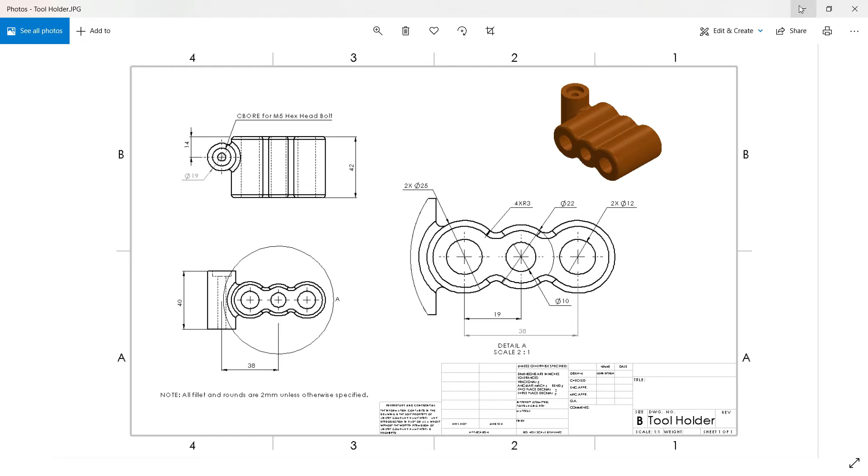Dimensions are provided. Have a detail view at A. You have the front view and the top view, also the isometric view. So I'll just minimize this one and start creating the part itself.

Let us create a new part file. Make sure that you double check your system units under document properties. I just change this to ANSI and units MMGS, and probably I just use no decimal places, then OK.

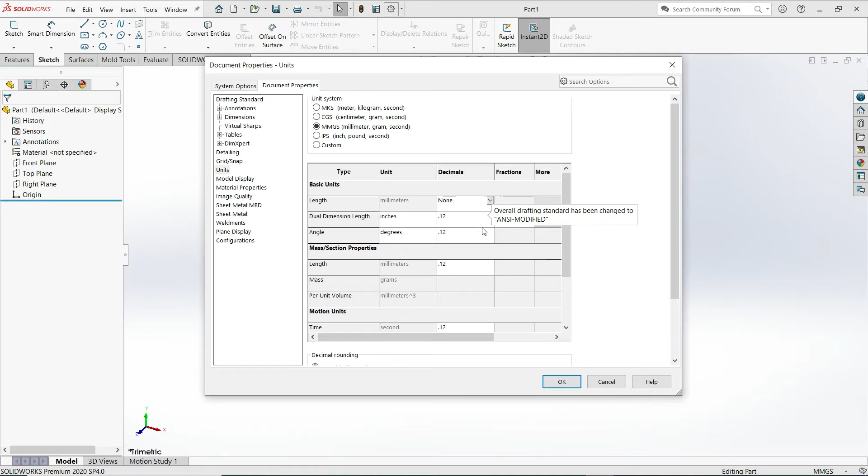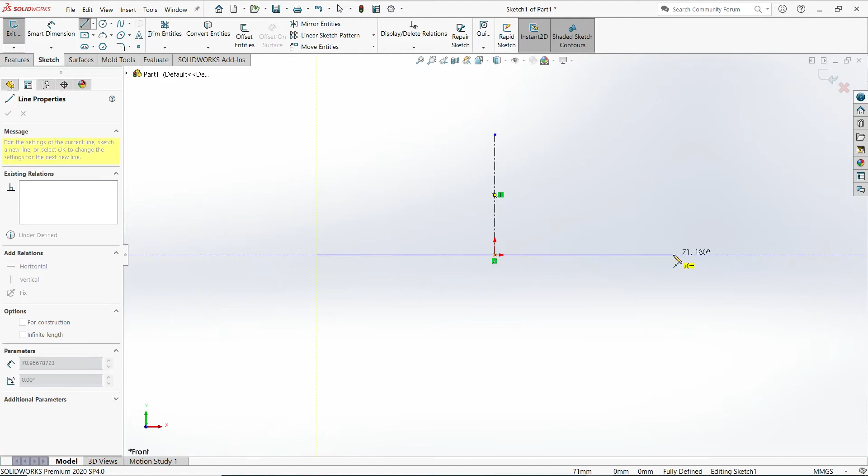I'll just sketch the profile using the front plane. I'll sketch a center line, and I'll sketch another line which is a midpoint line. I just draw a horizontal midpoint line here. Right click and select, I click this one and make that for construction. Then OK.

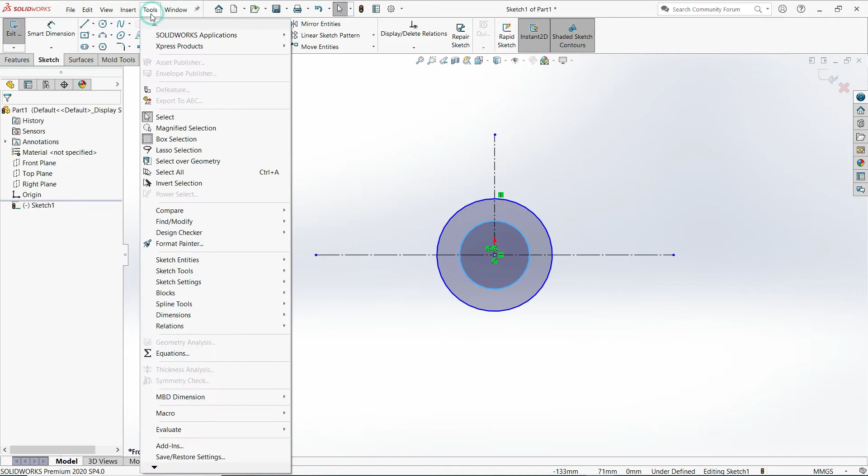So I'll just draw circles, and I'll use dynamic mirror. Select this vertical line, just draw circles here, also this one. Then I'll add the dimensions using smart dimensions.

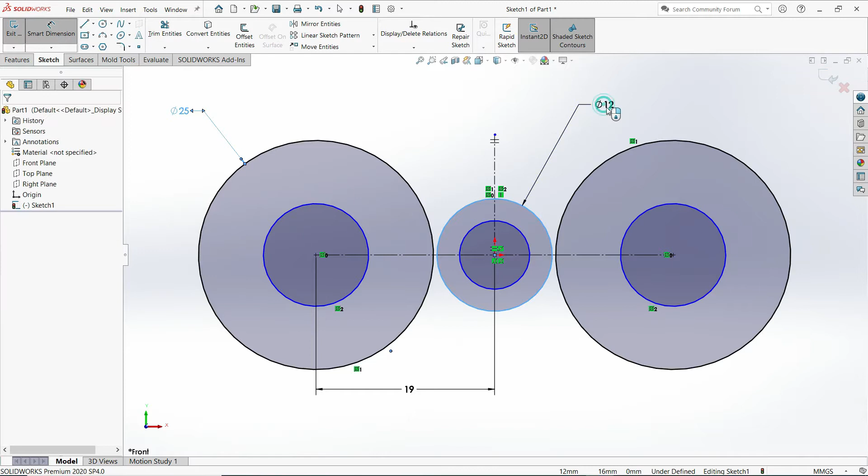I'll just measure this one, provide dimension here, let's say that is 19. This is probably diameter of 25. This one is 22, I think. Let's say this is 10. This one, let's say this is 12.

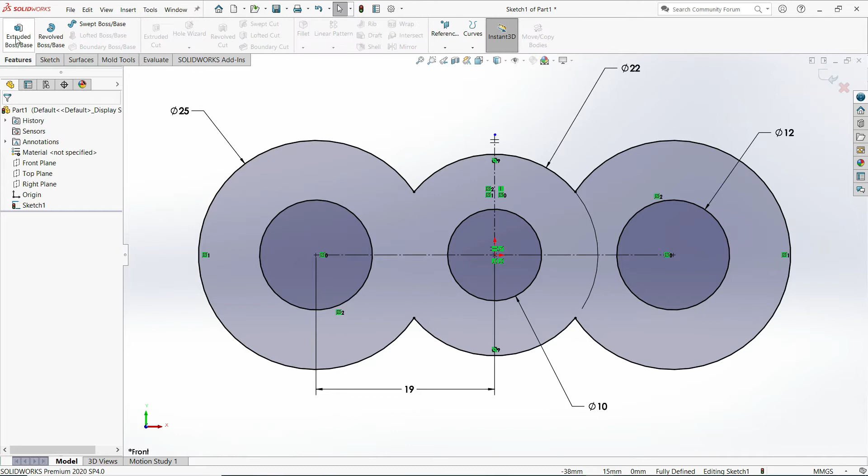I'll just use trim entities. Notice that the sketch is fully defined, so I'll close the dialog box and use the feature extruded boss base. Here I will select mid plane for the condition, and the thickness is given as 42 millimeters. OK.

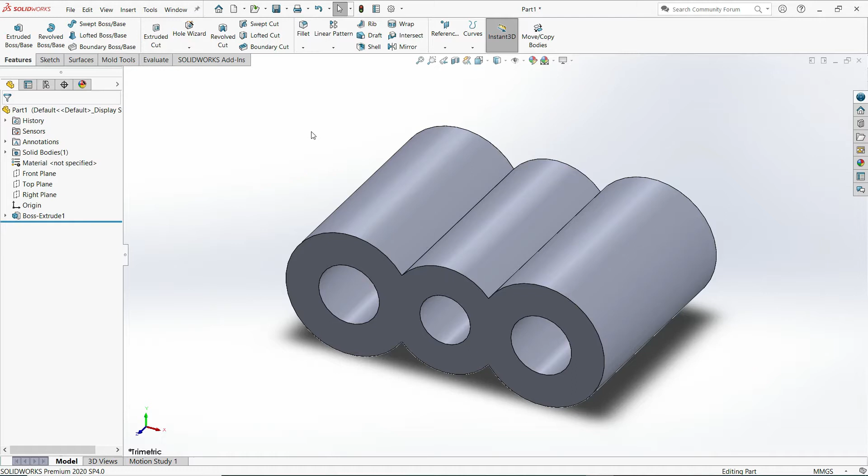So I'll just change my orientation view to top view. I select the top plane and sketch. I'll sketch a circle. Provide dimensions from the center up to this edge.

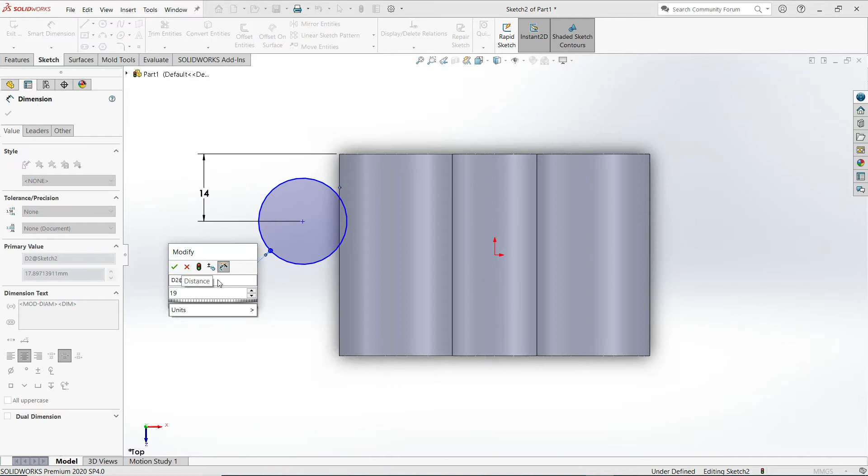So this is 14. The diameter of the circle is 19. The distance between the origin and the center is 38. Then I'll use extruded boss base again. I'll change my orientation to isometric view, use mid plane, and this one is 40. And OK.

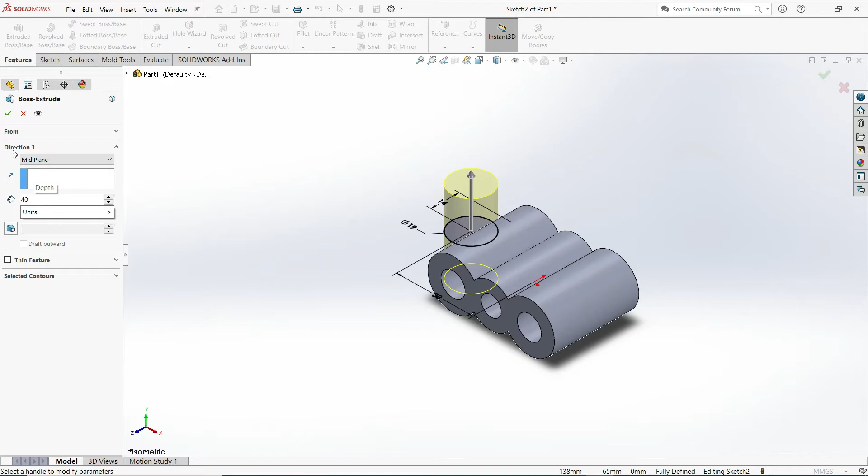Now I will be adding a special hole, so I'll use hole wizard. I'll select the counter bore under the hole type. Standard is ANSI Metric, and the bolt is M5, so it's good to go.

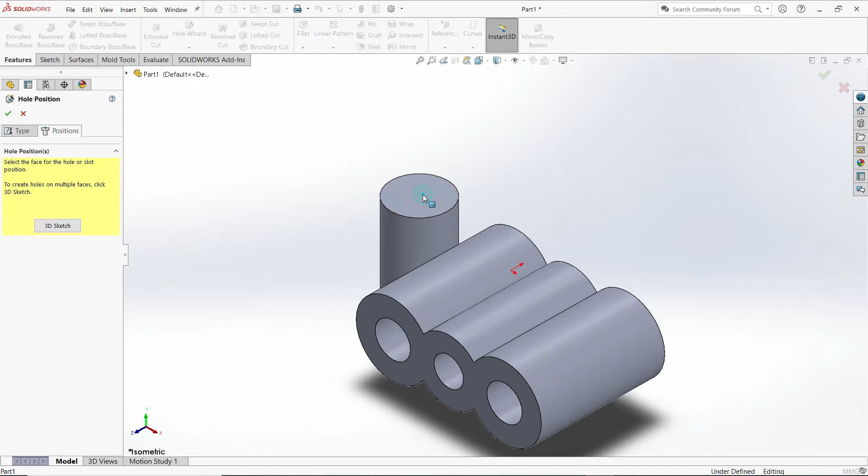Then I'll go to the positions tab, select the top face of this cylindrical boss base here. I'll invoke the center of that circle by hovering the cursor to the edge or circumference, click the center of that circular edge, then OK.

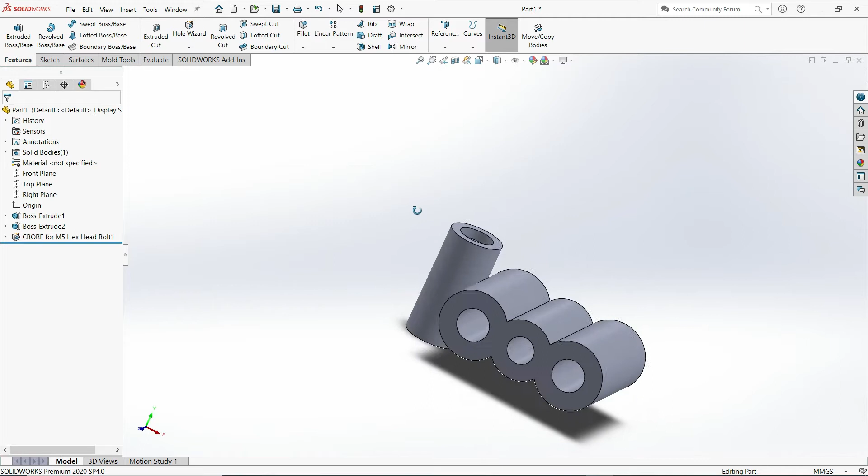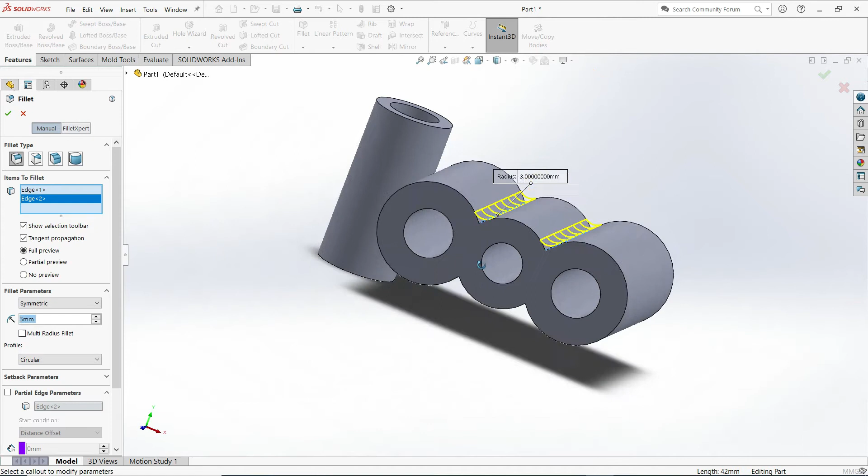So I have here the model, then I'll add some fillets. Radius is 3. I select these edges here, and also at the bottom. Then OK.

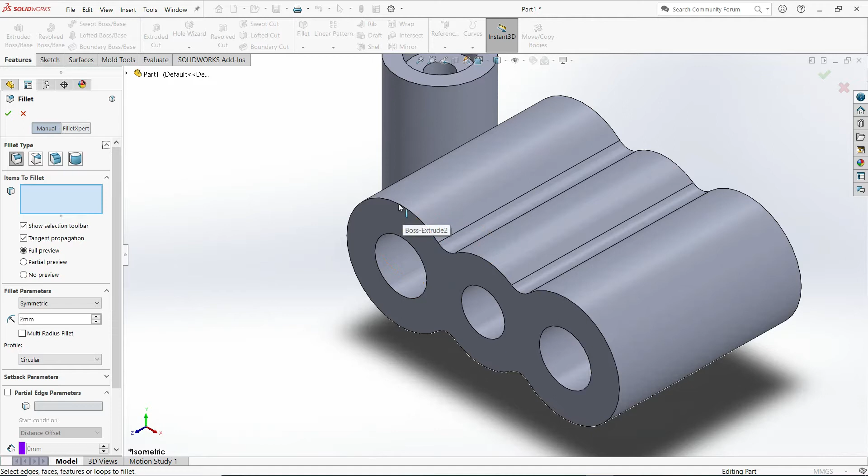Then I'll add some more fillets. Radius of 2. Select edge, this one, and also the edge on this portion here. Then I'll click OK.

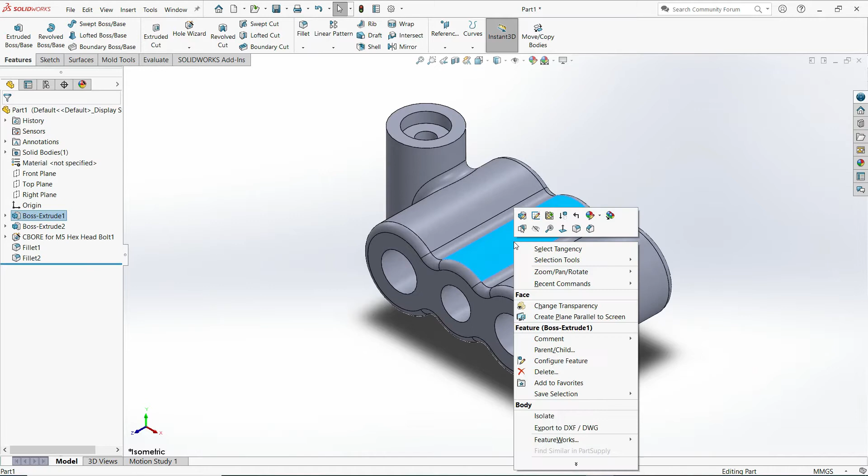Let me just change this appearance. Just right click under appearances, I'll select part. Probably change this color, so you would choose any color that you want here. Then I'll click OK to accept that color and change my display style to shaded only.

Then I'll just save this file as. I'll go to the tool folder. Then click the save button here.

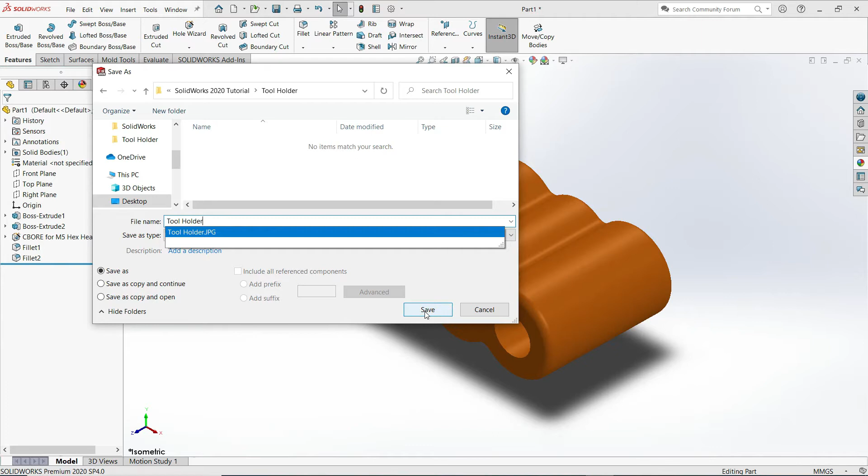Now I'll just create basic detailing of this part, which is a tool holder. So I'll select file, make drawing from part. Now the standard sheet size will be available for the sheet format size dialog box. So I'll select ANSI landscape, then OK.

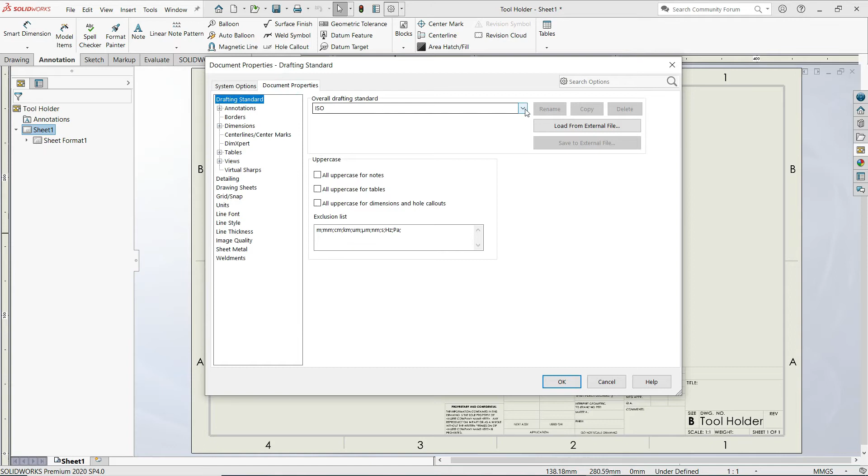Now the view palette is available under the task pane, so I'll later be selecting those views. Before that, I need to verify my settings, especially the units. So I'll click anywhere in the sheet area. Then system options, document properties, ANSI, then units MMGS, let's say no decimal places, then OK.

Notice here the file name of the part is provided under the drawing number. We could edit this one by simply right clicking sheet number 1 and then edit sheet format.

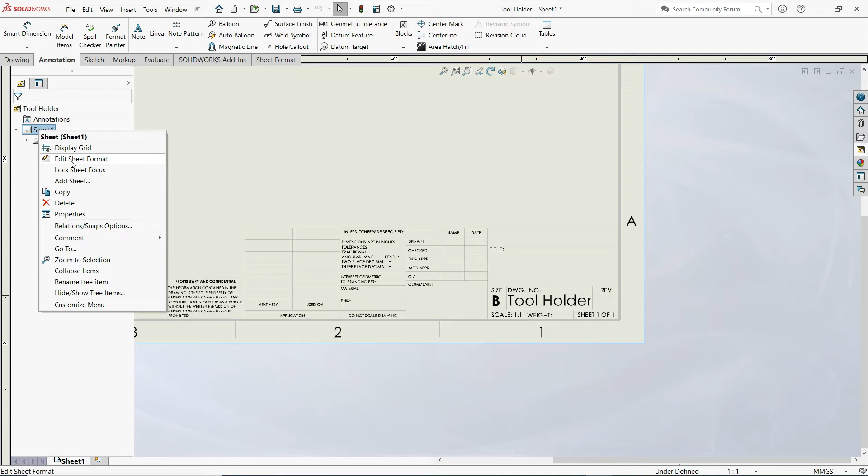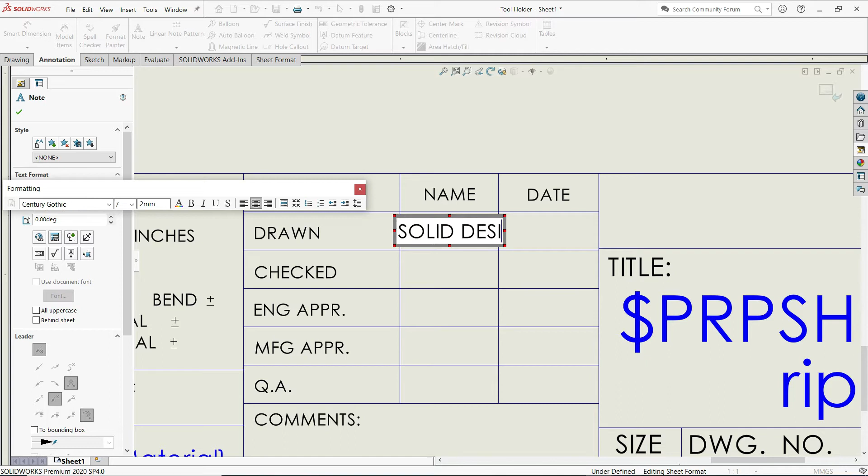So you could add a name here, probably with that note, text, then simply here I'll double click here, then provide a name. You have your formatting toolbar here, so I'll select everything, then I'll type a possible number here for the font size probably, and click outside.

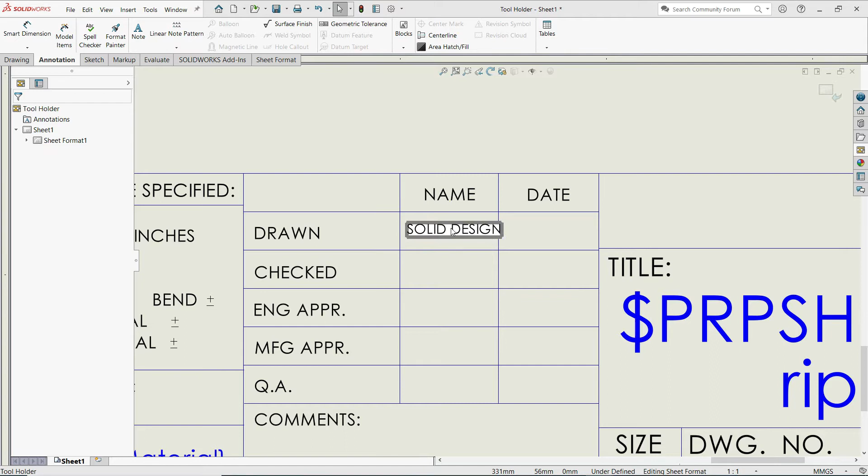Then I'll click, hold, and drag to place this location here. Similarly, you could double click anywhere here to change those names and so on. So I'll exit sheet format, since I have changed already. So you have here drawn by Solid Design.

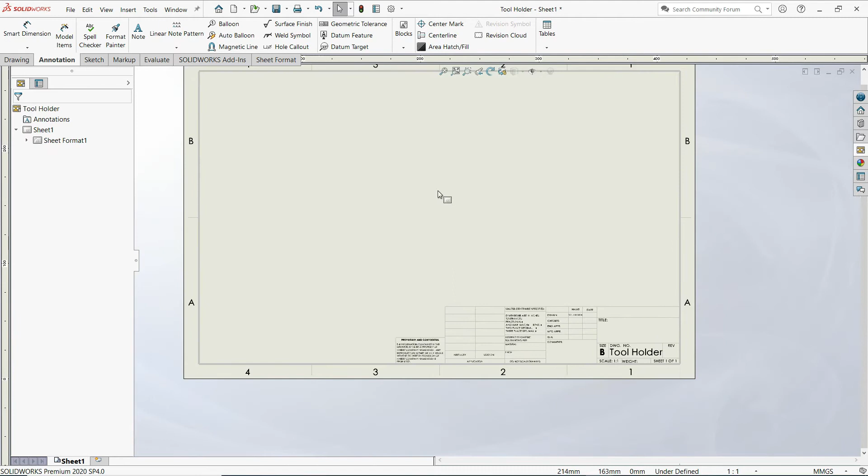I'll just press this F key so that it will fit in my graphics area. Now I will be selecting the views using the view palette. I have this toolbar here, then I'll select refresh. So among these views, these are the front, top, right, back, left, bottom, isometric, and so on, and even the current view from the open file.

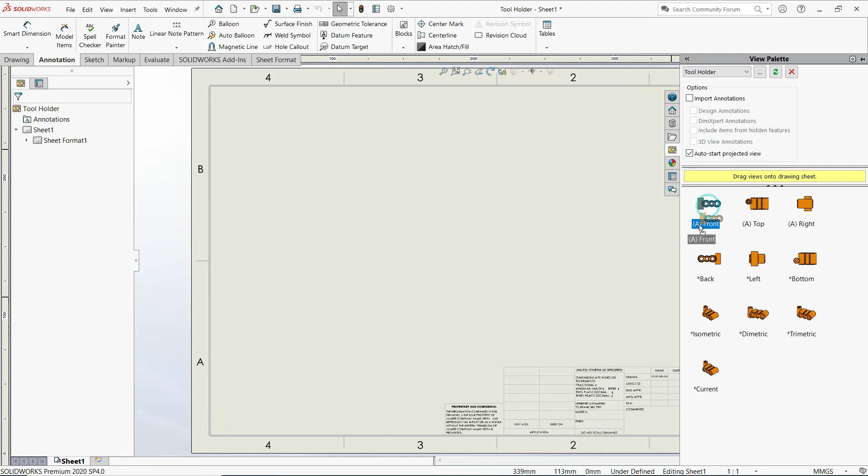So I'll click, hold, and drag the front view to the drawing area here. Then if you hover your mouse pointer or cursor upward, this will be the projected view of the top view. So I'll click here, and I just click the accept button here.

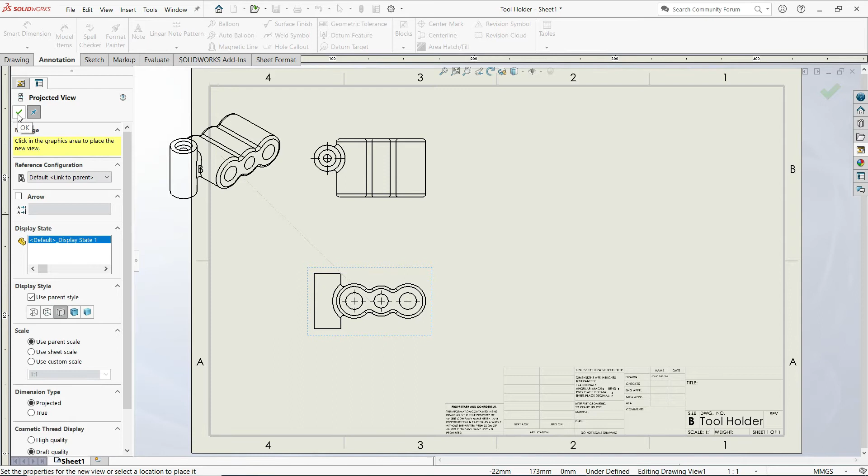Now I'll insert another view using the view palette, the isometric. I'll select this drawing view three and change the display style to shaded.

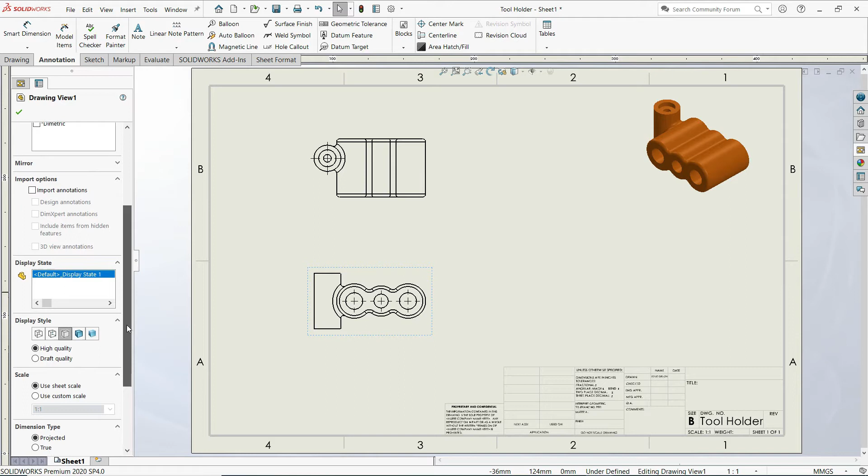Then I'll just click OK. Now I'll just click this view, the front view, and let us view that one as hidden lines visible.

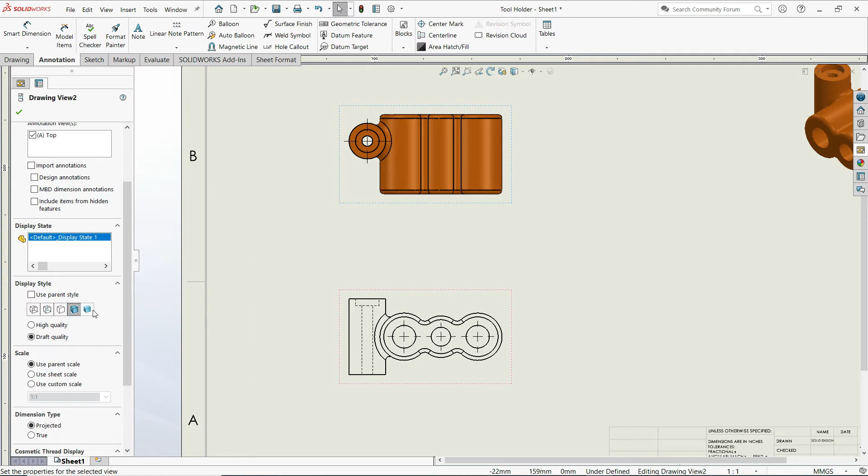Similarly, it is applied to this one. If you don't want it applied to this view, select that view, then remove this parent style here under display style. Then you could select a different display style. So I'll just use the parent style for the time being.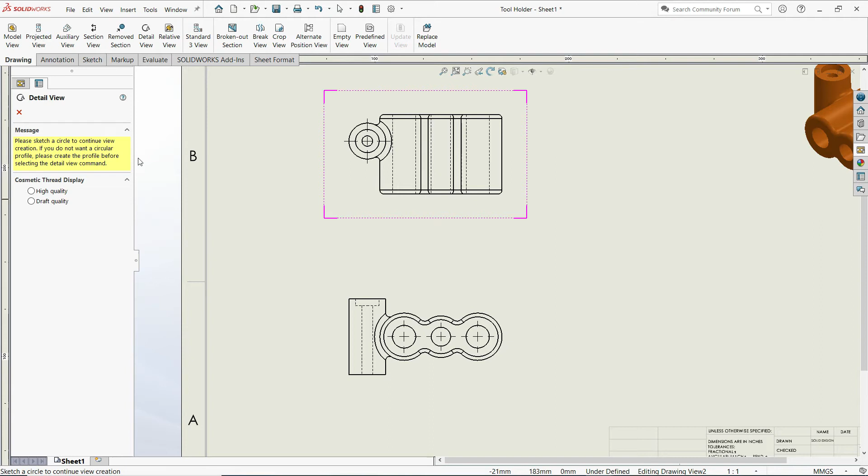Now I'll just add a detail view. I'll go to drawing, then select the detail view tool. Please sketch a circle, continue. So I'll just place a circle here, approximate that value or the circle itself. So I'm good to go.

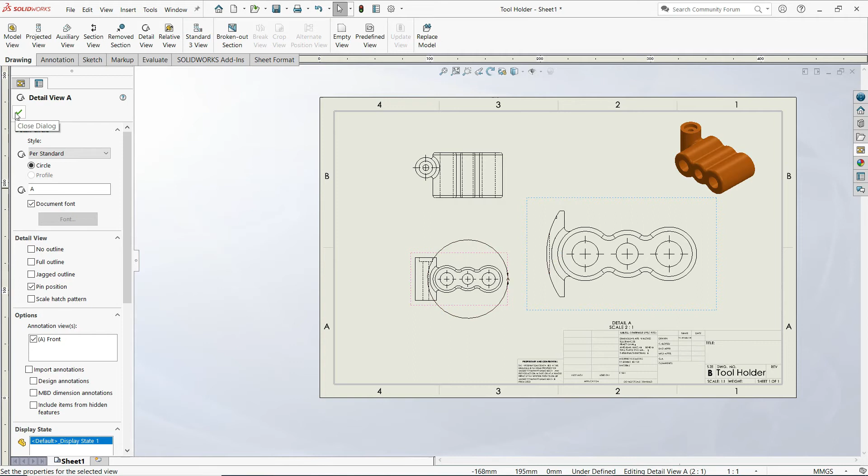I'll just click here, then the view will be available and attached to your mouse cursor for a second. So I'll just click here, then click OK, and I'll just adjust this one by dragging this view, and the projected view is aligned to the front view. Now, similarly, I could drag this one and relocate it to a place for better viewing.

And by the way, the hidden lines option is available here, so I'll just change that view. I'll remove the tick mark for use parent style, and simply use hidden lines removed.

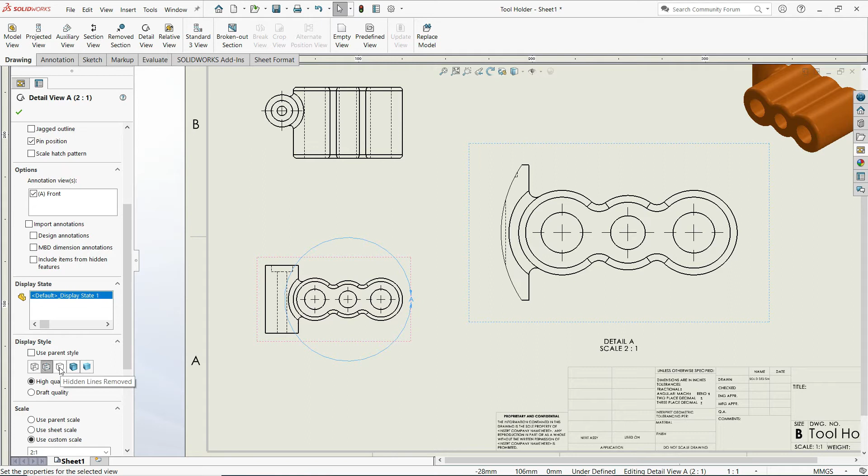Now, for adding dimensions, you can select it using the annotation command manager tab, model items, selected feature. Probably I'll just select the entire model, then marked for drawing. If you have a hole wizard location, choose this one, and also the hole callout. So I'll select this one and this one, and click OK.

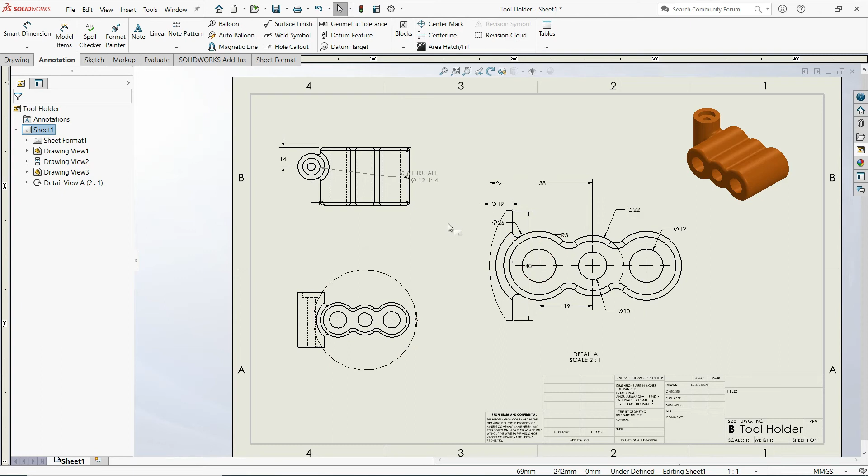The dimensions are provided automatically to the entire model. Then you may need to arrange those and position them.

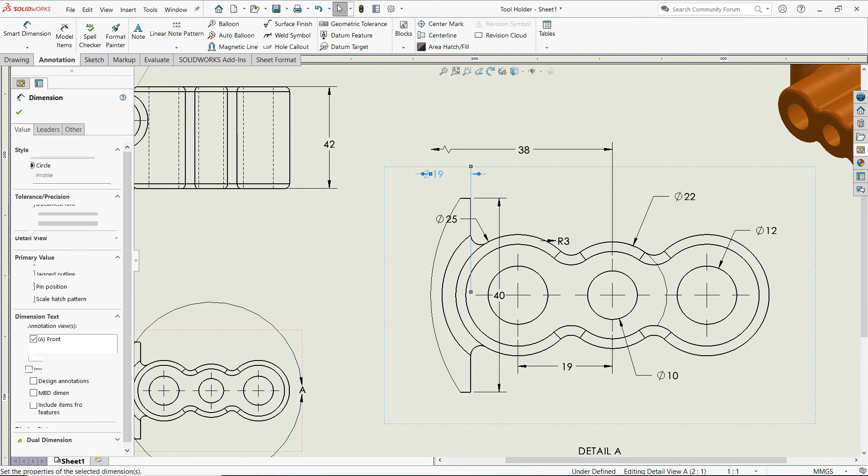So you have here diameter 19, probably this one, diameter is 25, here radius is 3 for this value. Okay, then diameter 22, diameter 12, okay, and diameter 10, 19, distance between the two centers of those circles, 40.

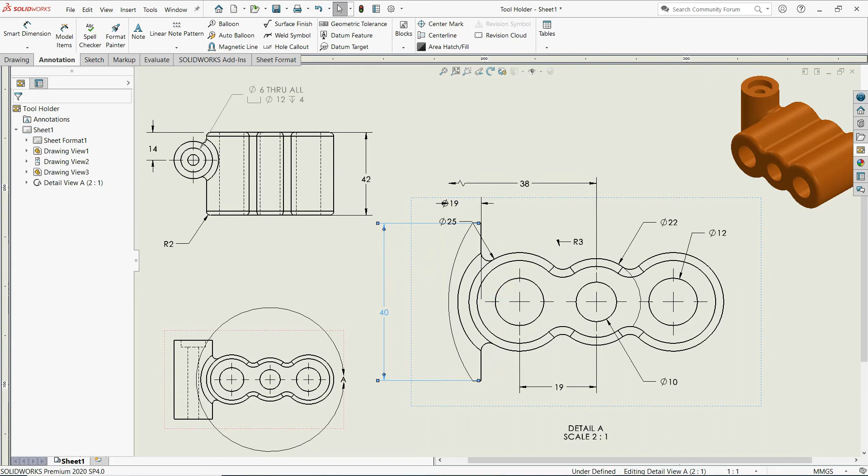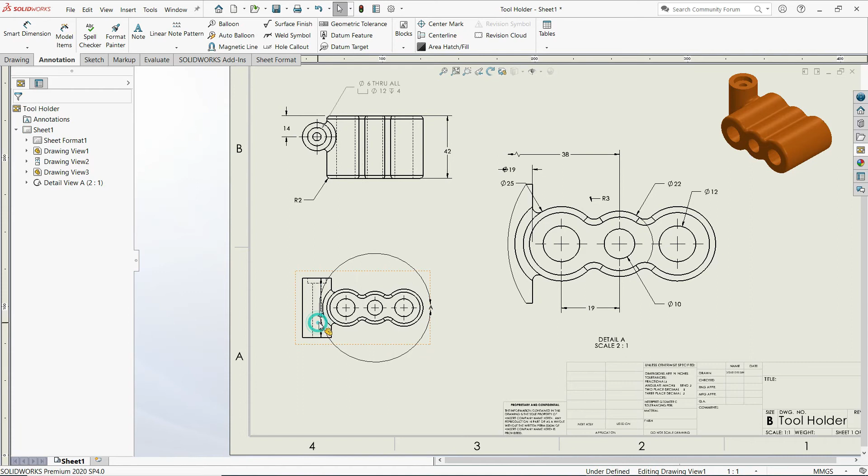So they are not placed good enough. So one way of placing them is simply by copying them or placing them to the other views. So I just place this one to this view here, to the front view, by pressing the shift key on the keyboard, then click, hold, and drag this view and release. So it will be automatically added to this one. So I'll just position the dimension.

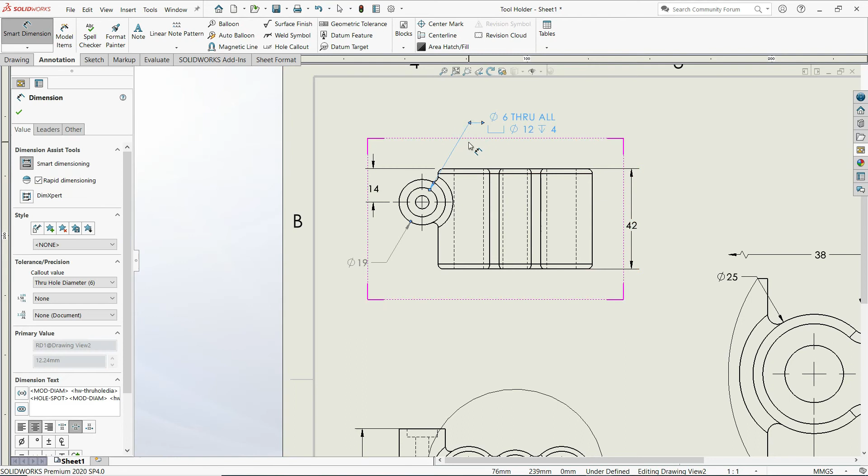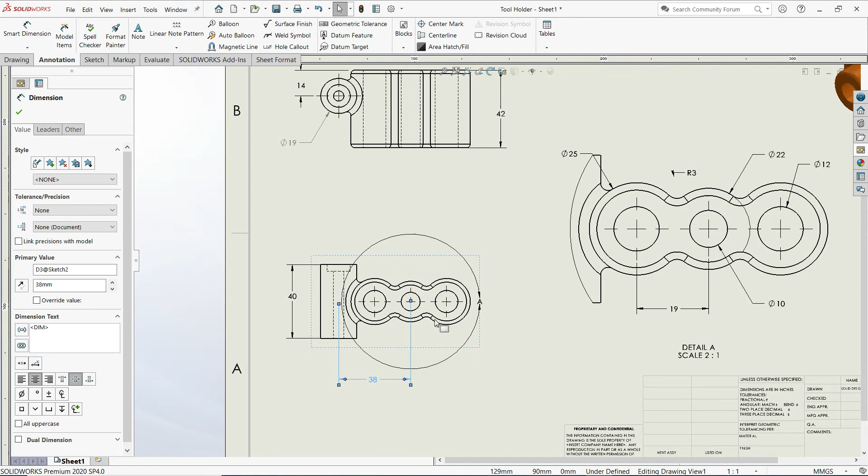Place it at the center probably. Then for radius 3, let us just hide this portion to this location. Probably this is good enough. This one.

Diameter 25. See the inferencing line so that it will be aligned to those dimensions. Probably also this one, that one. You would also place it downward at the bottom here.

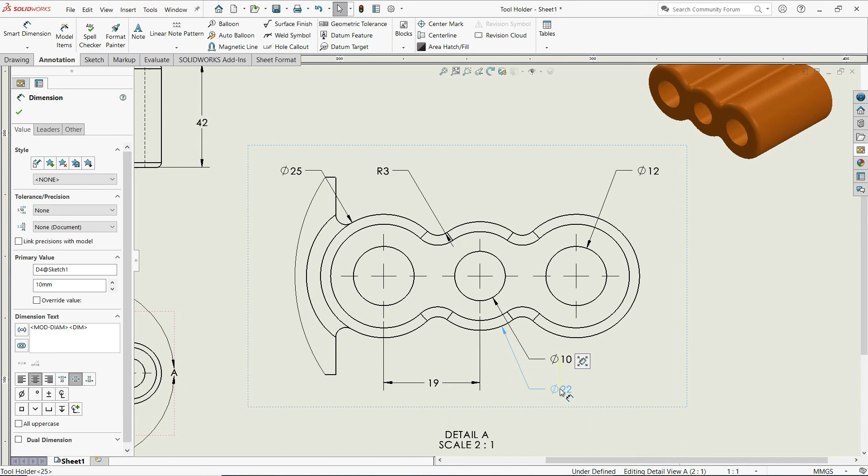Now probably there is a missing dimension here, so I'll just add a dimension to the center of the circle, and this one. It's 38.

Now radius 3 has 4 fillets here, so I'll just click this dimension. If your dimension doesn't look like this one, you may need to go to the leaders and then click custom. Make sure to select broken leader horizontal text. Probably yours would be somewhat like this one.

Okay, you may want to change it to this text position. So I'll just select this one. Under dimension text, I'll just provide 4 times. Okay. Then this one, I'll just override.

Probably there are 2 holes or 2 diameters, 2 circles with diameter, and diameter 12, probably similar to this one. Then this is good to go.

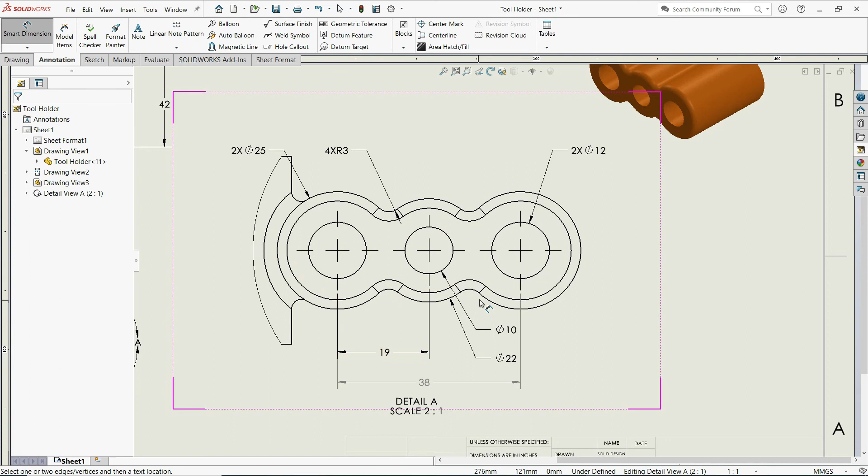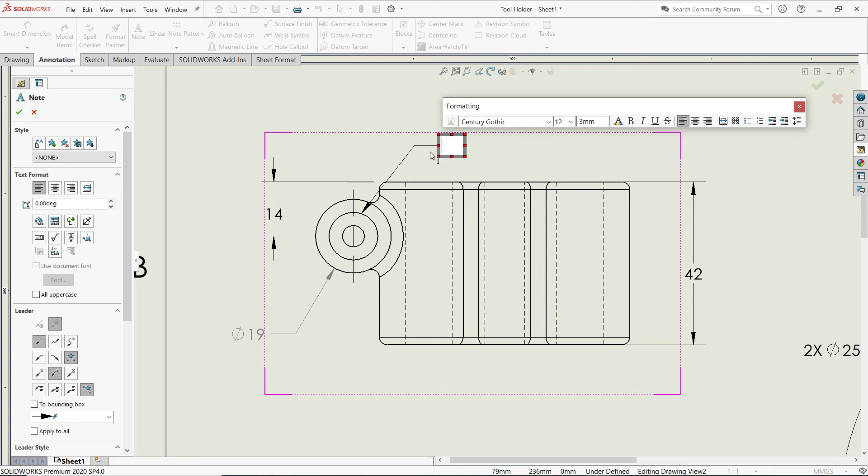It's complete, but then the counter bore here. So let us add simply an annotation note. So I just select the circular edge, place it here. I'll just type: counter bore, that is for M5 I think, hex head bolt.

Then you could change that orientation using this leader here. So I'll just select this one, underline leader, and then OK.

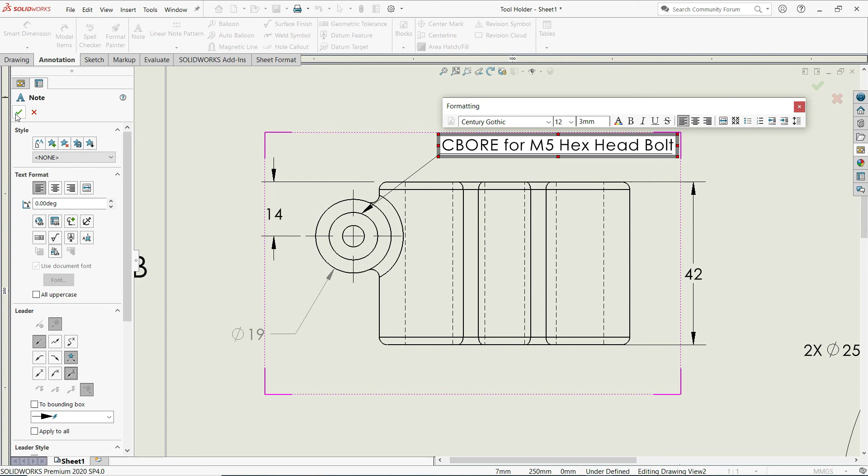Now for the final mark, I just add an annotation note here stating that all fillets and rounds are 2 millimeters unless otherwise specified.

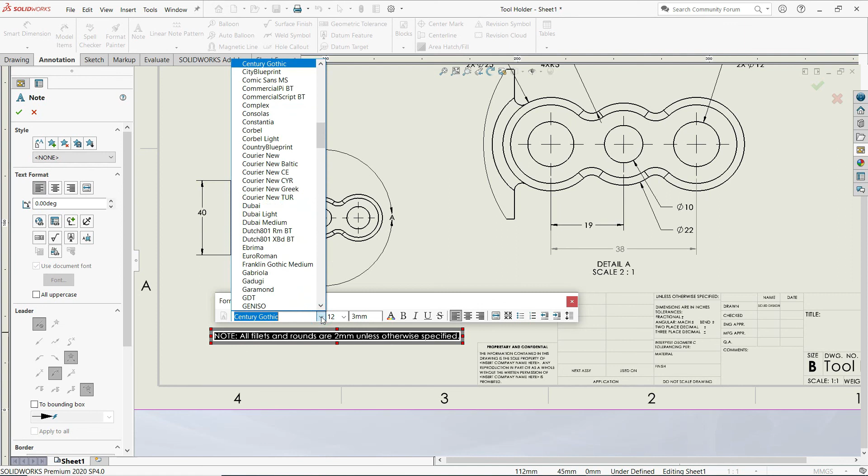You could highlight this one, and also you could change the font style, height, and so on. So I'll just leave it that way. Just close this one, or I just accept that.

Okay, so just press this F key, and this gives you a possible basic detailing of the given tool holder part. So just save this one.

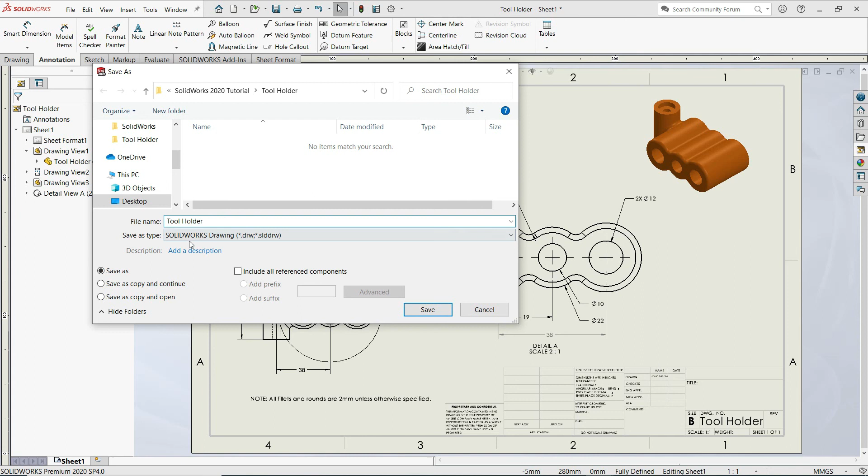Similar file name but different file type. Okay, then save. Then save all.

So probably I'll just, if you want to save this drawing file as a JPEG file, you can do so. Then save.

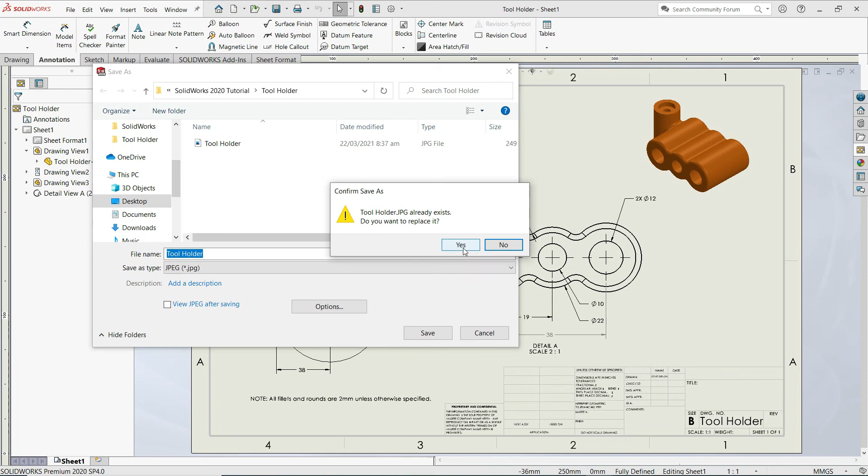I already have a tool holder JPEG file here, so I'll just select yes. And I could open that file. Then I'll just upload this one. There you have it.